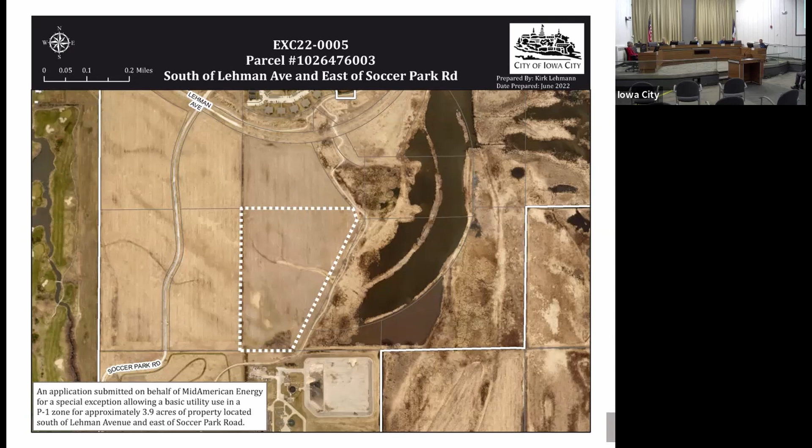There's not really any development nearby. There's some apartments north of Lehman Avenue, more than approximately 800 feet away. It is also within or right next to the 1,000-foot buffer of the water treatment plant. So this is an area that the city is looking to retain undeveloped for the purpose of allowing future expansions of that wastewater treatment plant. It is just outside of that area, but that would allow future expansion.

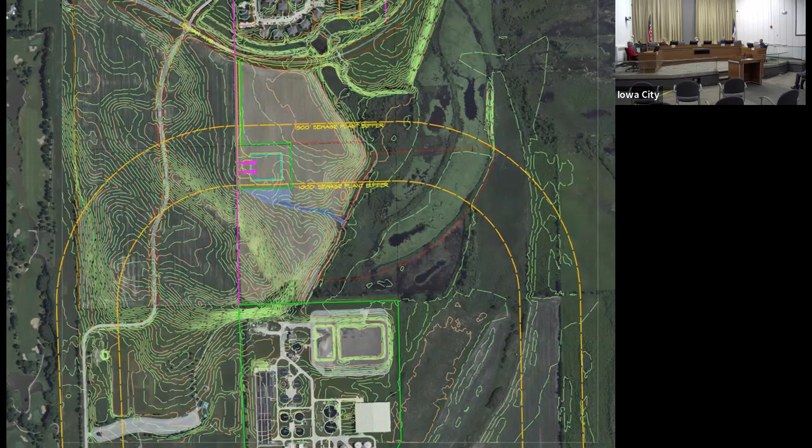As far as zoning, a portion of it was recently rezoned to neighborhood public, which is P1 zone. At the time the application was initially provided and we prepared the initial staff report, it was still zoned interim development, multifamily residential, and is no longer that for the portion where the substation will be. Adjacent zones are primarily neighborhood public as well, and then you also have some other interim development zones that are residential, both single family and multifamily.

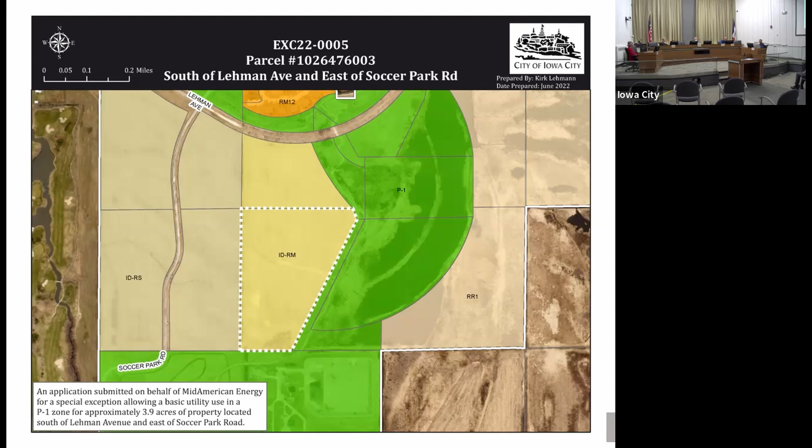So the purpose of this is to establish an electrical substation for MidAmerican Energy. It's on about 3.9 acres. Council just rezoned this property to that neighborhood public zone on July 12th. There are currently 8 other substations in Iowa City, and the most recent was installed in 2020.

Obviously electric substations provide a necessary service and allow electrical usage for surrounding areas, and they do have to be close to those uses for which they provide power, as they draw from transmission lines and then make that usable for the nearby development. The applicant did not hold a good neighbor meeting as part of this application, but they did reach out to all neighboring property owners. There aren't that many neighboring property owners within the 500-foot buffer.

Here you can see the site plan. There is an access easement that would run along the transmission lines currently running through the field south of Lehman Avenue. Then you have the site itself, just outside of that 1,000-foot buffer, and it would connect directly into the transmission lines.

Here you can see the transmission line runs along the west property line. You can see those towers that would connect into it; they're approximately 50 feet. The site plan also shows landscaping all around, including many large trees, and then fencing as well located around the substation.

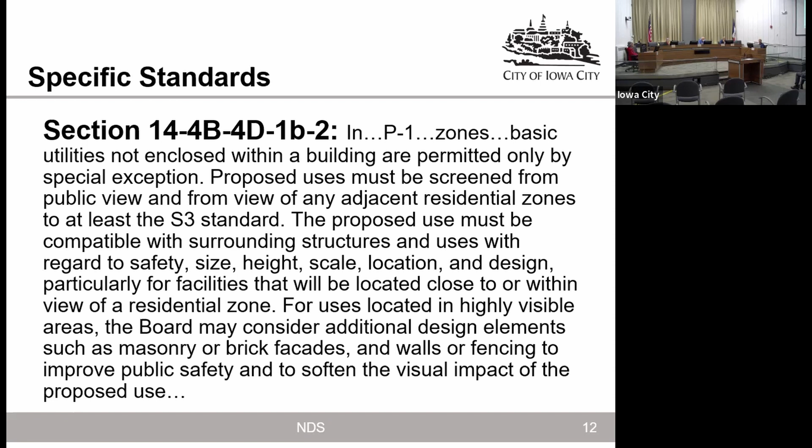First, I wanted to talk about screening for public view and the view of adjacent residential zones. Again, the property is more than 850 feet from the closest residential development, which is that multifamily complex north of Lehman Avenue, and the surrounding area is largely undeveloped and used for agriculture, so there aren't really any adjacent residential uses. In terms of the characteristics of the substation itself, the site's approximately 210 by 257 feet, and the substation is set back more than 75 feet from all of the property lines.

The tallest part of the substation is 50-foot tall dead end towers and shield masts. Those are what actually tap into the transmission line to the west.

In terms of elevation, the properties to the northwest and south are higher than this, so this is a lower elevation compared to those, but it's a higher elevation compared to properties to the east. So it sheds kind of to the east towards that Sycamore Greenway.

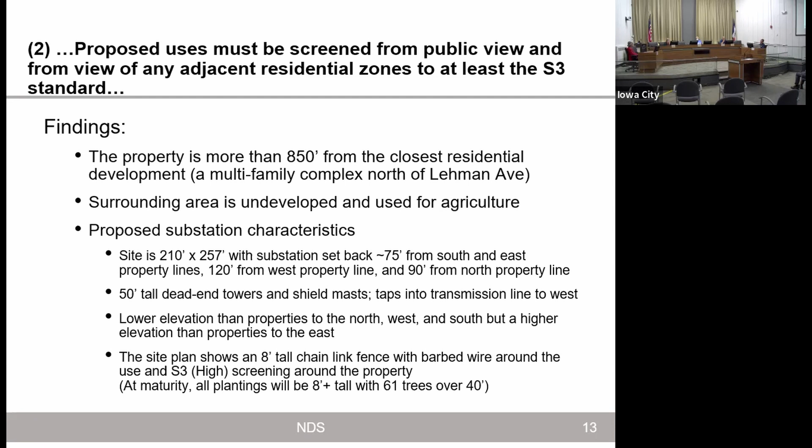The site plan does show an 8-foot tall chain link fence with barbed wire around the use, and S3 high screening around the property. There's lots of plantings around it, and at maturity, all plantings will be at least 8 feet tall, and there will be at least 61 trees over 40 feet in height, several of which are higher than the masts as well.

In terms of compatibility with surrounding structures and uses, future uses in the area may include residential development to the west, north, and east. The area to the south, the city is looking for that to be retained as undeveloped for the city's wastewater treatment plant buffer, about 1,000 feet, pretty much right to the south property line of this. It may also be developed as residential if the city is unable for any reason to acquire that property.

In terms of the proposed use, it's a relatively large use, but the property is compatible with surrounding uses because it abuts those existing transmission lines that run through the property. Again, it's adjacent to that wastewater treatment plant buffer within which residential uses are less desirable. And there are some

additional elements that help mitigate the effects on surrounding properties, which include S3 landscaping, which staff does recommend be a condition of approval. And then also the substation would be built prior to adjacent development. So instead of placing it in an existing residential area where it might not be expected, anyone who would move to this area would know that that would be a condition of living there in advance.

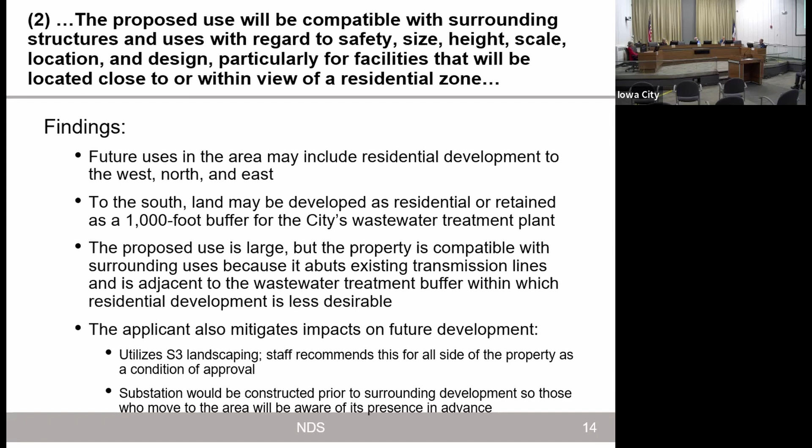So staff does believe that this specific criteria is met. There are also 7 general standards at 14.4B3 that apply to all special exceptions.

The first of which is it will not be detrimental to or endanger public health, safety, comfort, or general welfare. The use does provide a critical piece of infrastructure that allows future development in the area and provides electricity. The site plan also does show the proposed use surrounded with a barbed wire fence, which prevents access to unauthorized persons and mitigates potential safety issues that might arise from that.

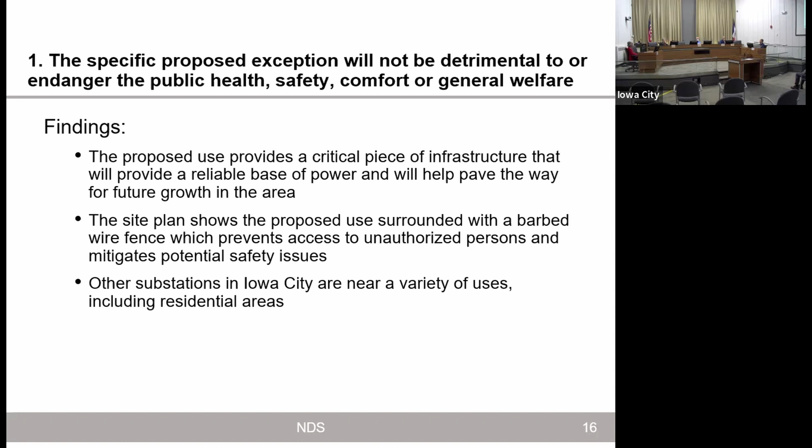And there are other substations in Iowa City that are all near a variety of uses, commercial, residential, but that does also include residential areas, including in the most recent substation in 2020. I'll talk a bit more about that later. So staff does believe that criteria is met.

The second criteria is that it will not injure the use and enjoyment of properties in the immediate vicinity. And again, the use provides power to future residents and businesses, and it's surrounded by undeveloped land with the nearest residential use more than 800 feet away.

There is some sound associated with the substation at approximately 35 to 41 decibels, which is similar to the noise of a library, bird calls, or ambient urban noise. And there are setbacks and screening that help mitigate some of that noise impact at the property line.

As far as lighting for the proposed use, it would typically be approximately 3,864 lumens. There would be an additional 30,000 lumens that may be activated by approaching vehicles at nighttime. There is more intense light that may also occur during emergency work, which may be up to 400,000 lumens approximately, but it would be relatively infrequent. So staff doesn't believe that it would have much impact on surrounding properties.

In addition, again, installing the substation prior to development means that folks won't be surprised by it when they move to the area.

Third is that it will not negatively impact surrounding development of property. Again, past substations have demonstrated that residential development does still continue by electric substations. The most recent one in 2020 just had townhomes being constructed pretty close to it, and it hasn't seemed to have any chilling impact on that.

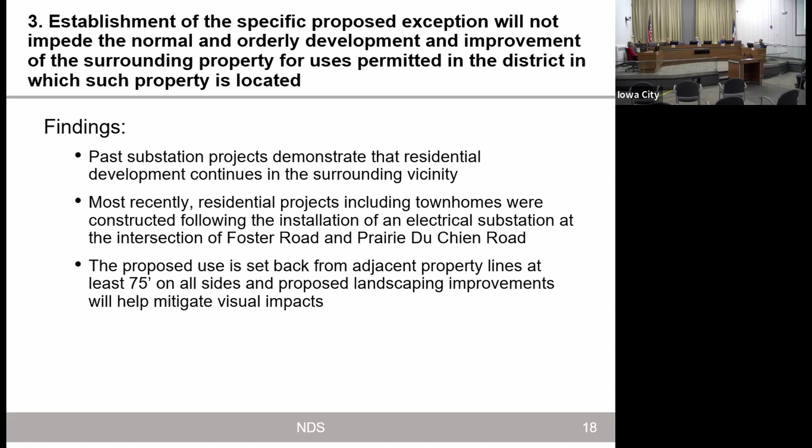Fourth is related to adequate utilities, access roads, drainage, and necessary facilities. The access to the property will initially be from a temporary public access easement shown on the site plan. The easement will be released upon dedication of right-of-way as the surrounding area is developed and finally platted, at which point the property would have direct access to a right-of-way. In the meantime, it would use this temporary access easement.

In terms of electricity, the substation is providing it, and stormwater management would be treated using an access easement across the adjacent property towards the Sycamore Greenway, which acts as a stormwater detention facility. That is a condition of the rezoning that was recently approved. If for whatever reason that isn't possible, the rezoning condition does allow for on-site detention, but that would need to be handled at site plan approval and comply with all of our stormwater management standards. Staff will ensure compliance with all applicable standards during site plan review.

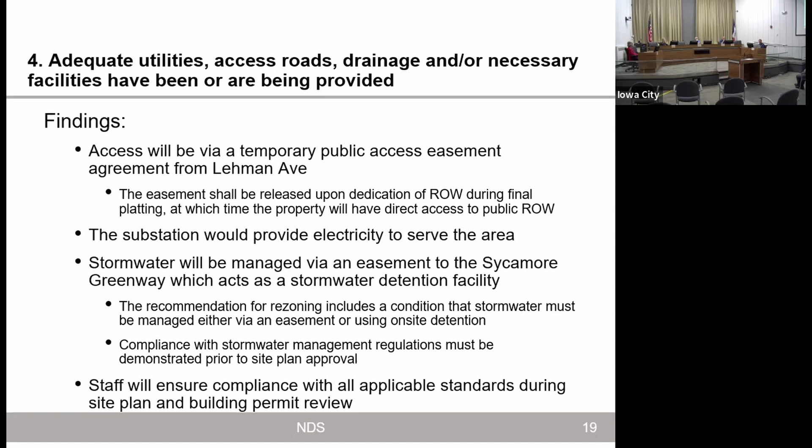In terms of ingress or egress to minimize congestion on public streets, it's got that temporary access easement and will have direct access to right-of-way as the surrounding area is developed. Lehman Avenue does need to be improved to where that temporary access easement is available, so they wouldn't have gravel, they would have chip seal, and the access easement would be the same. That is also a condition of rezoning.

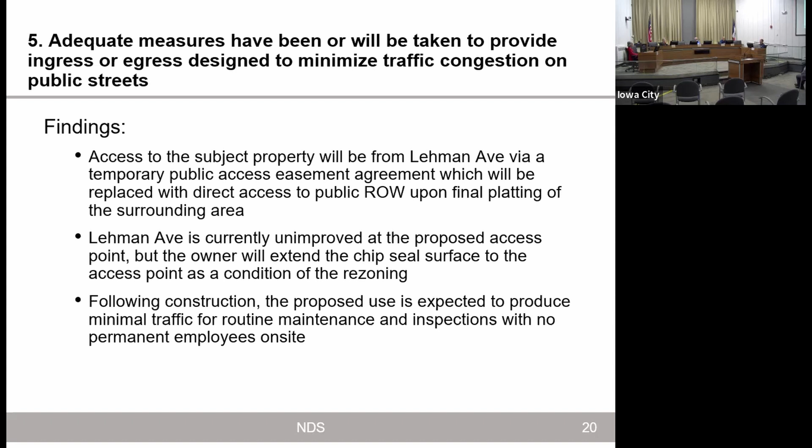Following construction, the electrical substation isn't anticipated to provide a lot of traffic because it wouldn't have on-site employees or anything. It would just be routine maintenance traffic, fixing items, that sort of thing. So staff doesn't anticipate any substantial impacts to traffic.

The sixth criterion is that it has to meet all applicable standards. The use does meet dimensional and site development standards in P1 zones. Basic utility uses are exempt from height standards, so that is not an issue. The site does contain some hydric soils according to their sensitive areas plan submitted as part of the rezoning, but there are no wetlands or remnant prairies on the site. They have to make sure their construction abides by our sensitive areas ordinance.

It also has landscaping that is generally consistent with S3 high screening, but staff does continue to recommend that be a condition of approval. The reason staff recommends that as a condition, not just required due to the circumstances of the application, is because there isn't really any adjacent surrounding residential development, but in anticipation of that future residential development, staff believes that screening should be provided.

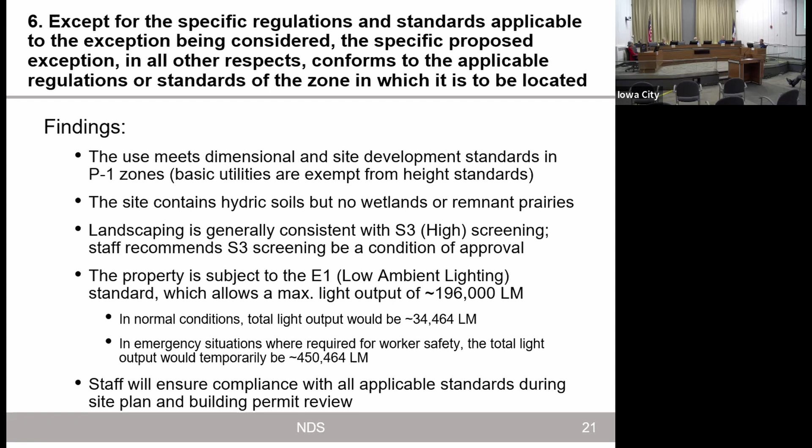The property is also subject to E1 low ambient lighting standards, which allow a maximum light output of approximately 200,000 lumens. In normal conditions, total light output would be about 35,000 lumens. There are some emergency situations, required for worker safety, where total light output would temporarily be above that, but because it's only temporary, staff believes this standard is still met. Staff will ensure compliance with applicable standards during site plan review. Building permit review will not actually be required, so it would just be through the site plan review. Staff does believe that those criteria are met.

Finally, the proposed exception must be consistent with the comprehensive plan, which is the final criterion. The future land use map designations for the area are for the South District plan, shown as form-based land uses, which are based on transects, where transect 3 is the suburban transect.

Within that transect, it's shown as neighborhood general, so it's a mix of lower intensity housing uses: single family, duplexes, some lower scale multifamily. There's also transect 4, which is general urban transect, and that would be neighborhood medium, some higher intensity multifamily uses that you might have.

The comprehensive plan itself shows it as residential at 2 to 8 dwelling units an acre. There are essential utility uses which would serve this residential development that is consistent with these future land use designations. The comprehensive plan does support coordination between private utilities and the city to provide high levels of service for areas under development at an efficient cost.

There are also standards in the comprehensive plan that talk about the need for contiguous development to avoid leapfrog development. This is clearly not contiguous with adjacent development, but it is suitable for the proposed use because it's adjacent directly to those transmission lines that are already existing, which provides lower cost services and still provides the high levels of service that staff wants to see.

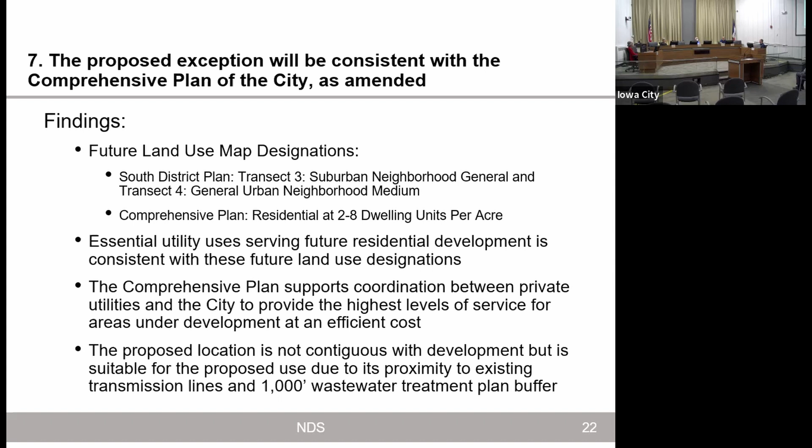You are also directly adjacent to that 1,000-foot wastewater treatment buffer, so it is adjacent to other similar uses. Staff and the applicant did look at trying to provide this use within that buffer, but due to the soils available there, it was not possible to do.

Based on these findings, staff does believe that this criteria is met. Staff did not receive any public input as part of this, but based on the findings in the staff report, I did include an additional addendum, a cover memo essentially for this meeting since we were delayed, so I was able to provide you some information on that rezoning. But based on all of this, staff does continue to recommend approval of EXC 22-0005 to establish a basic utility use in a P1 zone for an electric substation for the property located south of Lehman Avenue and east of Soccer Park Road.

This is subject to one condition, which is to provide screening to the S3 standard along all property lines. You'll notice that the way the condition is discussed in the cover memo is slightly different than it was in the staff report, which is that this shall be approved by the city forester prior to site plan review. This was really trying to align it better with some of the conditions that are in the rezoning, so it was a slight tweak. It doesn't have any substantive change, but it just adds more clarity as to how that needs to be approved.

That is staff's recommendation. If you have any questions for me, I'm happy to answer them.

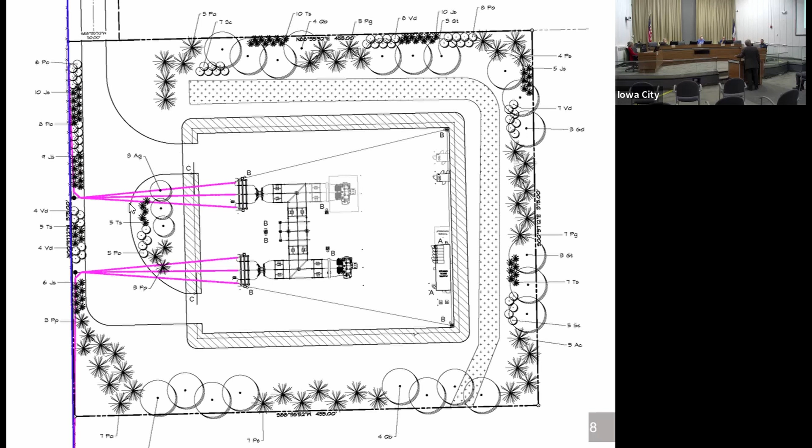Up at Lehman, yes. I don't know, Kirk, do you have another map there that showed the access easement that goes to the north? Yeah, I don't think I've got the closest one, but here's the one. Yeah, the only place we're planning on entering this site right now is the temporary access easement to the north.

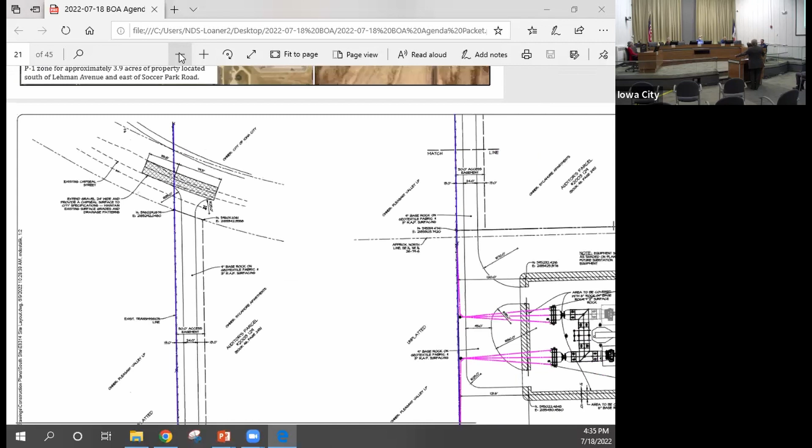Eventually, as the land to the north develops, there will be a public street system that will serve as an access point, and we will move our access to the point where the public street comes closest to the site, so it accommodates development. So the access easement is to be temporary in nature. And I think there's two gates for the substation itself, just accessing to the west within the land we own, but our access out to the public road is only through one entrance.

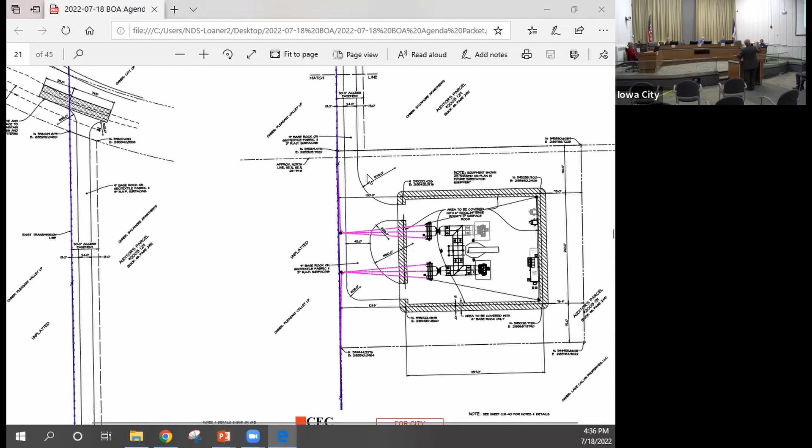I understand that, for Lehman. But you do have two gates to the substation itself. I believe that is to accommodate the traffic of trucks that will come in to bring the equipment, so they can come in and exit out in that direction, and that's why we have the two gates. So, but will they remain as two gates then? Yeah, yeah, they'll stay that way as two gates. Okay.

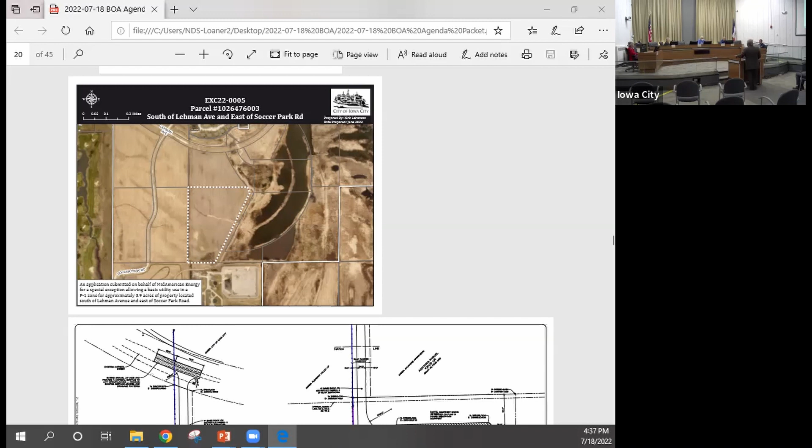Any other questions? Who owns the property? MidAmerican will own it. Presently, an entity named Lake Calvin Properties, whose attorney Mike Pugh is here, is the seller of the land to us. They also own the property to the north, but the access easement is along a related entity named Sycamore LLC, which owns the land to the north and is giving the access easement. Correct.

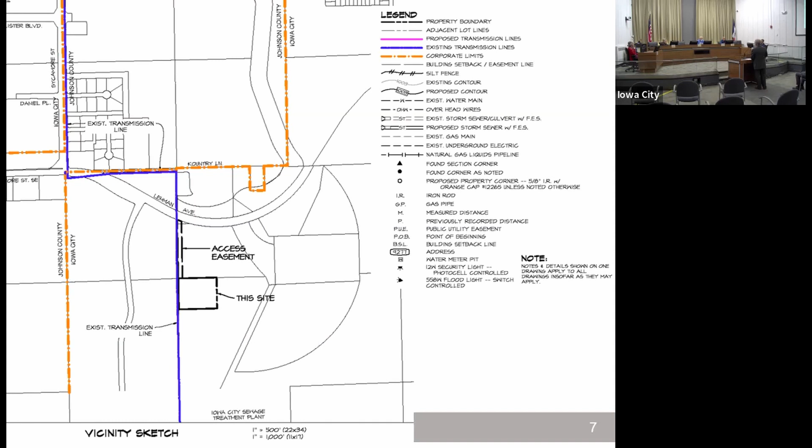Any other questions for the applicant? Thank you.

Now we would at this time invite public comment. Anybody in favor of the application to speak?

Good evening, everyone. Mike Pugh, 425 East Oakdale Boulevard, Coralville, Iowa, 52241. I'm here on behalf of the property owner, Lake Calvin Properties. Mr. Pose is correct. The same owners own the property to the north as well under a different limited liability company. I suspect that by the time we sell the property to MidAmerican, it'll be under the same entity.

We are fully in support of the application. We've been working hard for many months with MidAmerican to get this site to the point that works for them and for us. We've also been working hard with the city on the concept of the temporary access easement that will go away at some point once the property to the north is subdivided.

I would encourage you to adopt the staff's recommendation that the site be screened to S3 standards, although right now the property is not developed.

We anticipate that someday it will be residential uses around the property, maybe not to the south. We are currently working with the city regarding a potential sale of that property to the city. But if that does not transpire for whatever reason, I would anticipate that someday that'll be residential uses as well.